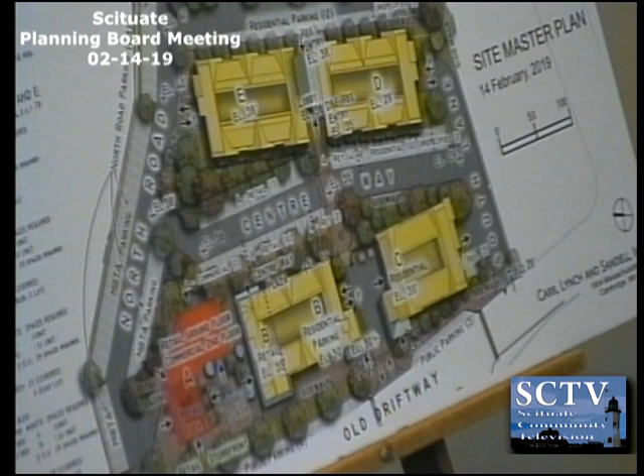We can give you the breakdown of those as well, but the Greenbush Plaza area, as we're calling it, we really want to create a vibrant sense of place there in the public plaza. We'll show you some renderings of that in a few minutes. So the idea is to have a great mix of retail and commercial in that space around the plaza. We'll have seating for people outside, bike racks, storefronts. We want to make sure it's a really active and lively place.

That's really our goal, to have an interesting mix of uses there. We want to attract a whole bunch of different types of residents, but hopefully we can attract residents who are commuting into the city, hopping on the train in the morning, going to work. So we're going to be pushing for that type of tenant. The reality is you'll see a lot of empty nesters too who want to locate and live here, but we really want to make it an attractive spot for folks, whether they're staying in town or new to town, to take advantage of all the great things Scituate has to offer. That's why I mentioned the bikes and promoting the use of the waterways and everything else we love about Scituate.

As per the town guidelines, 15% of the units will be affordable. That's 12 units spread throughout all of the buildings, a mix of 4 one-bedroom and 8 two-bedroom units that we've designated. And I don't know if we want to break there.

Jim, will you just show the renderings of the public spaces before I go on to the next piece? Okay, do you mind? Who does that? And if you want to speak to these as well. It's not a good start when your pointer doesn't work.

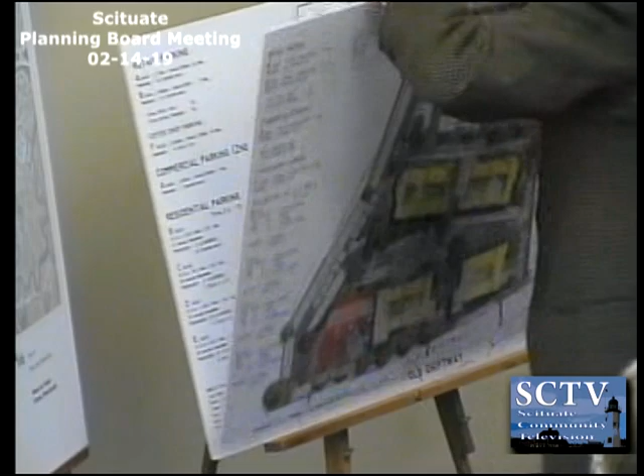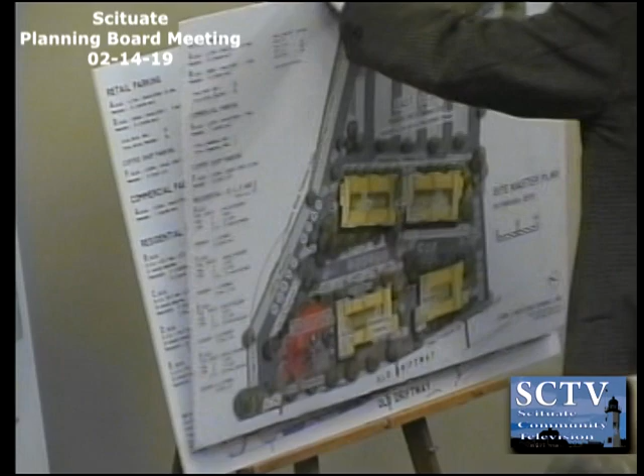No, okay, this is the illustrative site plan. I'll get out of the way so folks can see it. It shows finishes, surfaces, materials that delineate the travel ways, roadways, and internal circulation, as well as the open space, green areas, and plaza areas. When you take the trees and everything off, we've done this drawing which is much easier to visualize and understand in terms of the uses, and also compliance with local zoning for parking for the units.

So this drawing shows North Road access up to the bulk of the MBTA parking in the east lot, as well as parking along North Road. This is a plan we've gone back and forth on with the MBTA, working out how they would manage it, surveying the cost to make sure everybody has their stickers and all those things. So it's all kind of put in one place.

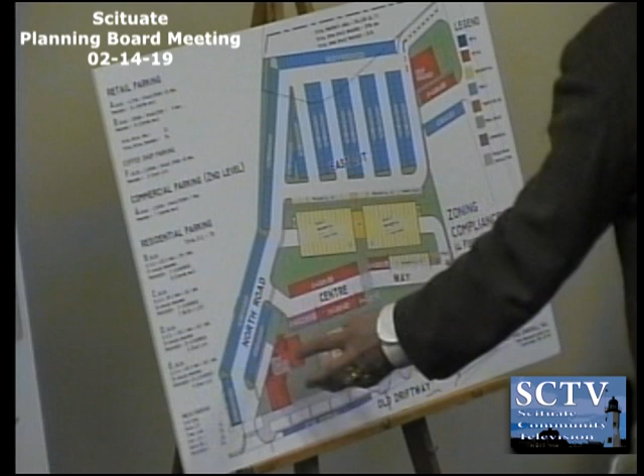As John said, when we began, this project actually began with this as one of the sites, if you'll remember the first time around. Then ultimately the RFP wound up saying, okay, we're going to sell the whole lot, but we get to keep most of it for parking. God bless the MBTA. So we developed the plan, and what we really wanted to do was get a streetscape, but we recognized this will never be Newbury Street because there are no connections on either end. So what we tried to do was create enough density with the retail to create our own place here, and we used buildings A and B to form the physical shape of what we're calling our public space, our public plaza.

So the concept is you can go out or you can sit in here, and we're hoping for some kind of a coffee shop or retail, that's what we'd like to see. So you can sit in here and look across and see the platform. And when it's time for the train to leave, you know because you hear it and you see it, so you just simply walk across and get onto the platform.

I think what we tried to do is amplify and create a plan that was consistent with what you folks did in terms of creating a special district, because this is how planning should work, right? Here's a train, this is where you want the density, this is where you want the people. So we've tried to reinforce that with public space on our piece of land, and define it by the retail wrapping around it and making it a good place.

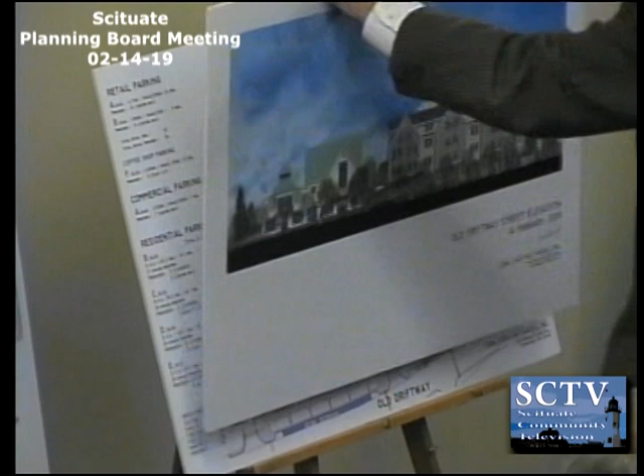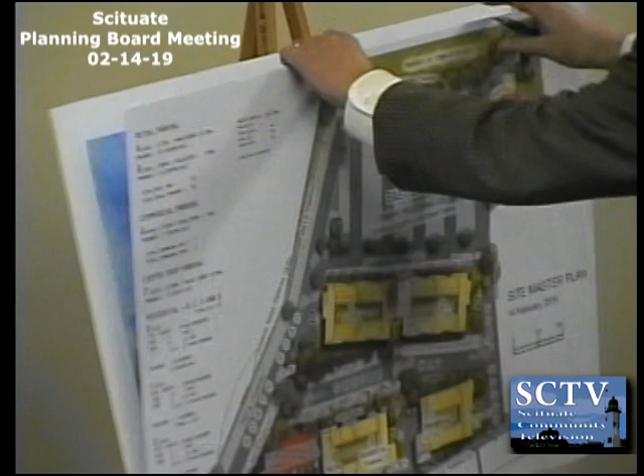So we did an elevation, and this elevation shows the dark line is the cut through the profile of Old Driftway. That's the exact roadway, and this is the site. As you all know, the site climbs up precipitously in some places, from the low point down to the very end, up to the high point. So we've developed a build in terms of the buildings being podium-based buildings where we can take advantage of the site.

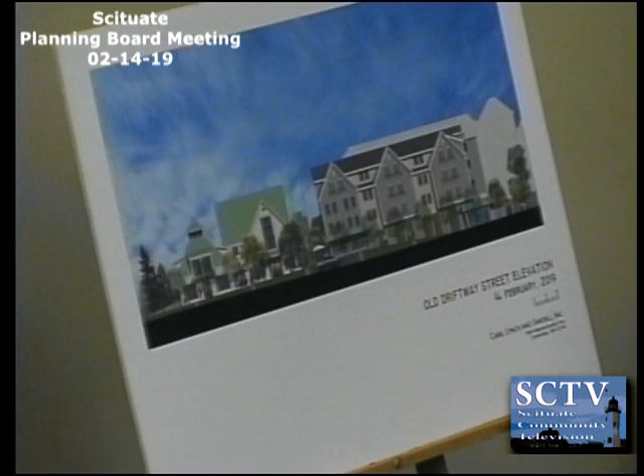Where as we step up, we can come in underneath and have a podium with a retaining wall on the uphill side, columns on the front side. So if we have to conform to the parking required for the units, we just run out of open space. You know, the cars take just a tremendous amount of space.

So our plan, I think, actually works really well because we can use all of the space underneath the buildings, underneath the podiums, for parking for the residents above, which is kind of what you want in the weather of New England. So you can come from your unit above, go down through the core, and exit right into the garage. So you can park and you're on your way. That works really well.

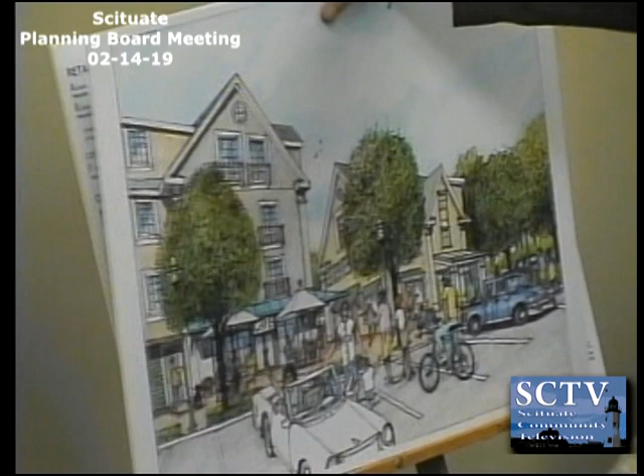So we then generated some sketches of the possibilities of how we would develop the public spaces that link the retail, the public plaza, and the connections to the other buildings, D and E. These are walkways. This is the parking for the retail and the commercial, and some residential, but this is one sketch of kind of what we see as possibilities.

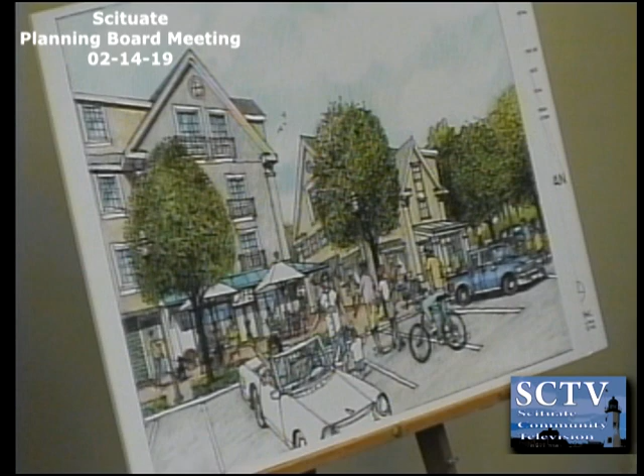This is building A, this is building B. The ground level of building B is retail space, and the ground level of building A is retail spaces. This is adjacent to the Centre Way. So sorry, that's building A to the right and B to the left. It's the back side of the building. Oh, I see, we're standing behind it. Correct, gotcha, sorry.

No, this is the view I'm thinking of, this is the view from the train. Okay, let's start with, now the platform is behind my back. This is the Old Driftway coming here. So this is building A, this is building B. And the retail kind of wraps around the whole public space. And we're envisioning on that ground floor what would be ideal is a good place to eat, a good place for your family to go and get an ice cream, go out and sit in the piazza, a good place to service the needs of the local residents as well as the town of Scituate.

We see it being connected to the train as much as we can. You get off the train and you're going to walk home, and you're going to go over, and maybe you're parked behind, so you grab some pre-prepared food and grab dinner on the way. Maybe you live up here, so that's pretty easy, you just go in and get food and go upstairs, you're home.

That retail is just on that one stretch of B, not all the way around the corner of B. It's out back too, it wraps around. This is a sketch, represents just that one side, the one corner of B, it runs front to back. It's easiest to read on this plan, see the crosshatch? That's the total footprint for B, just this one piece that faces the piazza, as well as the street.

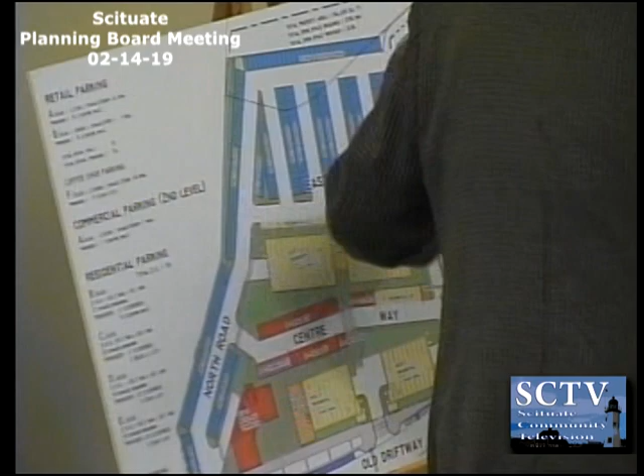Oh, so that's the circulation for the drive-through? Yes, exactly. This was the initial concept - if you come off Driftway, this is the through lane, directed one-way in. One way, but we can queue up here, order coffee, go around and pick it up. And these are the spaces for when they screw up, you can pull in, go yell and get your coffee. But this is done kind of for planning to make sure we can do it, because drive-throughs are difficult to make sure they work.

But David Black's here, he can speak to the traffic, because we're doing the traffic studies.

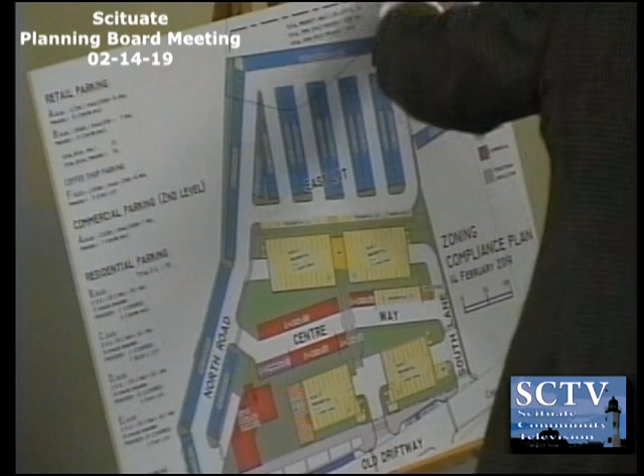If that is a one-way in off of the Driftway, yes, and then you're going to scoot around with some parking spaces there - I would suggest that you make that a one-way out with a right turn only, no left turn at all. The top of the hill is here, so the safe way would be to take the right. Only right, yeah, no left turns. Okay, all right.

David, you might want to speak, I mean, just - yeah, I think first of all, just by way of background, I'm David Black from VHB.

I've been doing traffic engineering and transportation planning for more years than I want to admit - about 45 years. 30 years of those have been on this side of the Atlantic. And John was actually my very first client, so I've been working with him for many years.

He literally met me off the boat and showed me which side of the road to drive on.

We've done a fairly detailed traffic study for the project based on the current program and the illustrative site plan. VAI has done a very thoughtful peer review, highlighting things we need to walk through, such as the drive-through operation, whether there's enough room for queuing, and whether turns out of the site should be restricted to right turn only. So we're absolutely coming at this with a very open mind.

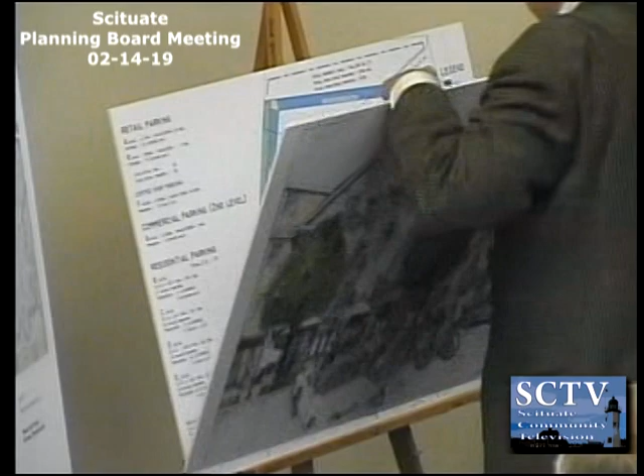Our answer to that problem, which is a problem when you drive by. There's a lot of podiums for driving from Scituate into Boston, you go through Weymouth and Quincy, and a lot of buildings are built that way, with parking underneath the building. You look in and see the soffit of the garage ceiling, all the junk hanging down and the lights, and it's never thought out because the budget doesn't go that far typically. So it's awful.

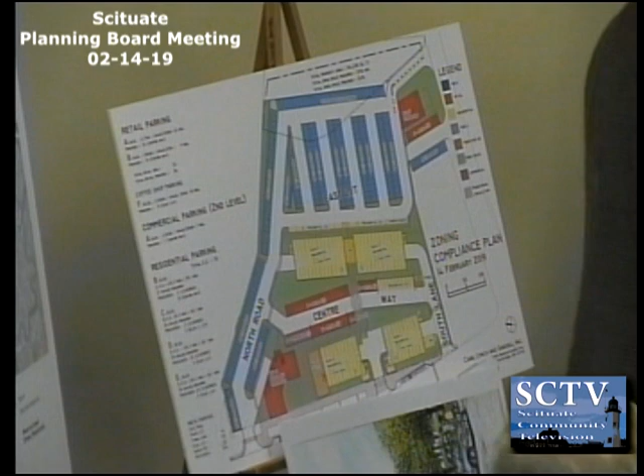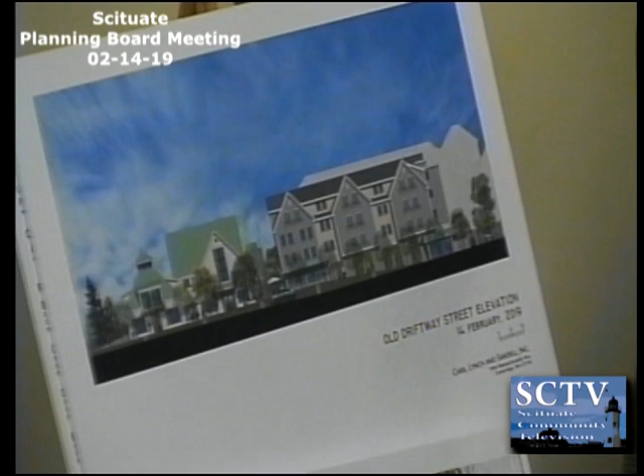What we're proposing is at the face of the building to show a screen detail, like screens that are built to hold vines as they grow up the side of buildings. We're going to do a light steel structure across that open area, put a screen on it, and plant Boston ivy along the base. Boston ivy's a great plant, it goes up and fills out, and it looks good basically all year round.

We're having our mechanical engineers give us their assessment and quantify the amount of air that can flow through. It's not a wall, it would be a green wall. We're thinking that would be a nice solution, growing green year-round, while still letting air flow through, so you should not be able to see in. The green wall should stop you from seeing in, so the parking would be behind that.

May I move on to have the board ask questions? And then open it up to the public? All right, I'll start with the town planner. Well, we have our traffic consultant here too, would you like him to say a few words? Sure. Thank you. Mr. Dirk?

Good evening, Madam Chair and members of the board. For the record, my name is Jeffrey Dirk, I'm a partner with Vanasse & Associates, and I'm your review consultant. We've had a chance to review the plans and materials submitted for the project, and as the chair indicated at the beginning, and as you heard from the development team, this is a project that's in flux. If you look at my comments, what you'll see is we've got to bring everything together. There are things in the traffic study that need to match up with the site plans, and the site plans need to be engineered. So in my comments, I'd have the applicant take those as guidance on what we'd expect to see in the next submission of documents that come before you.

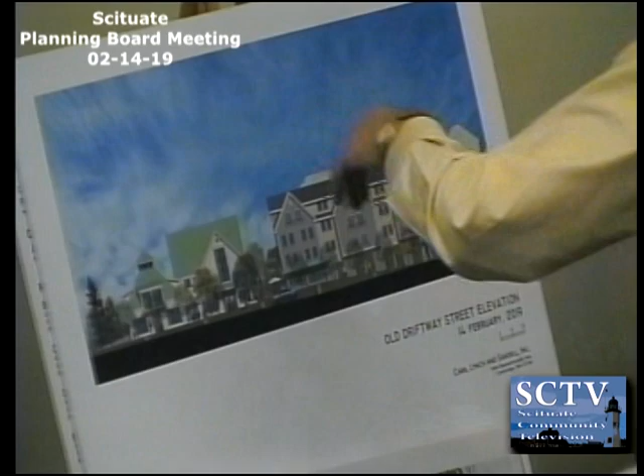I'll start with the site plan. I think from the standpoint of what you see, there's a lot of great concepts, and the project itself has a lot of excellent attributes to it. And now we need to engineer this plan.

So I think as we're looking at this, we need to make sure, as the applicant has said, vehicles can access and circulate within the site. Thinking about loading and delivery, how do fire trucks get in here, how does that all happen in the environment with on-street parking and everything, which creates the village atmosphere they're talking about, but now we need to bring it to the functional level.

So where are the loading zones? What size trucks are we talking about when they get into the driveways themselves? That's all going to come as a part of the engineering of the plan.

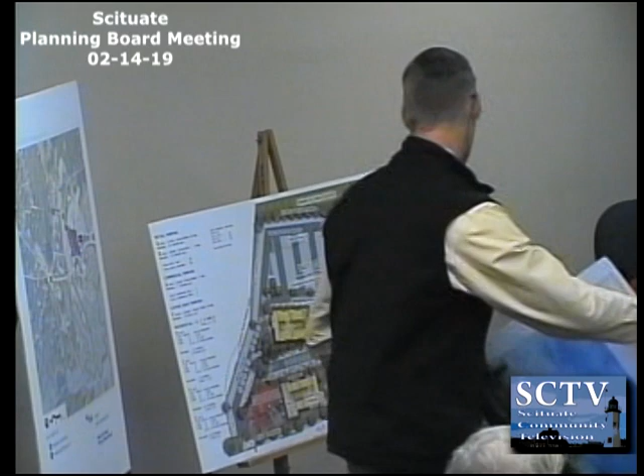The other thing we have to look at is this, I had not seen the zoning compliance plan, so we've asked that they develop what you typically see as your zoning compliance chart. We need to see, does the parking comply with your zoning standards?

The one thing that was of concern to us, we understand this concept of shared parking here, is that we know there's great access to public transportation, but as you get away from the urban core, parking for residential, when you start getting below 1.5, that's a low parking ratio.

And I think what they've got here, just looking at the residential piece, is somewhere around 1.37 or so, which again, the reality of residential as you get in the suburban area is just thinking simply of, I need to go grocery shopping, there's not a grocery store here.

So even though I may leave my car here and jump on the train and go to work, that's great, but when I come home, we need to think about how residents are getting to do those normal daily things, which starts to get us to a parking ratio of somewhere between 1.5 and 1.7 for the residential.

So it's great if they can do mixed use some of these parking spaces, but we'll need to see through some analysis that they'll provide to say they're achieving those parking ratios, because you really need between 1.5 and 1.7 to make the residential functional.

If you don't have that, what you start to see is then where they're designated the retail, those will end up being residential. This retail starts pushing over into the commuter, so it starts having this cascading effect. Again, I'm sure they can figure it out, we just need to be able to see the numbers that relate to that.

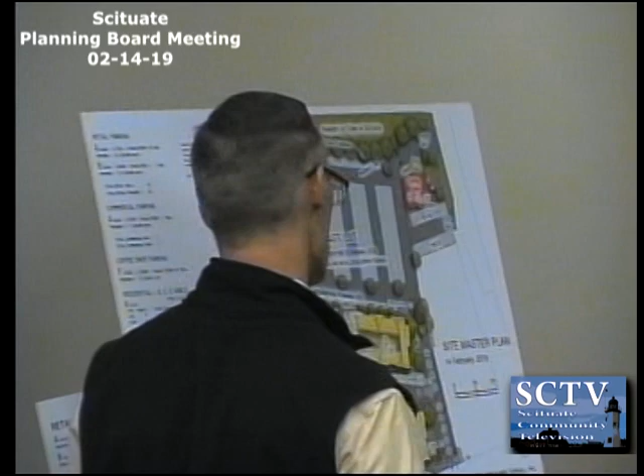So not only are we adding a curb cut, but now we're having two curb cuts that are offset from the exit from the parking lot. So we've asked the applicant to explain how that's going to operate and undertake what they describe as a safety analysis, because this creates conflicting turning movements coming out of these lots. Again, if you picture the train comes out, everyone gets in the car and they're leaving, the interaction of those exiting movements for these now offset driveways needs to be thought out a little bit more as well.

Lastly, in looking at the plan, there was mention of this coffee shop as a placeholder. There's a lot of implications related to that coffee shop, as you probably know, not only the queuing, which we've asked the applicant to go back and look at as well, but the way that we generate traffic numbers from mixed-use developments changes as well.

So the way that this has been done is it's assumed that all of the retail space is just classified as general retail, and it's analyzed as a shopping center, which when you have a large amount of retail space, that makes a lot of sense.

With a small amount of retail space, and one of them being a drive-through operation, it starts not to have those traffic characteristics. What you end up having is this use here will end up generating more traffic in and of itself than this small amount of retail space. So that has significant implications in terms of the net increase in traffic, but more importantly, how this driveway functions.

We've asked the applicant to take a look at this driveway, and I know you've had some comments on that as well. We're very concerned with how this will operate, especially having an entering lane next to a drive-through lane. As you imagine coming into the site, there's a significant conflict point as you're merging one-way traffic entering a drive-through lane that wraps around the building with two-way traffic on the drive aisle. If you start drawing arrows on a plan, you see a convergence of a lot of things happening in that area.

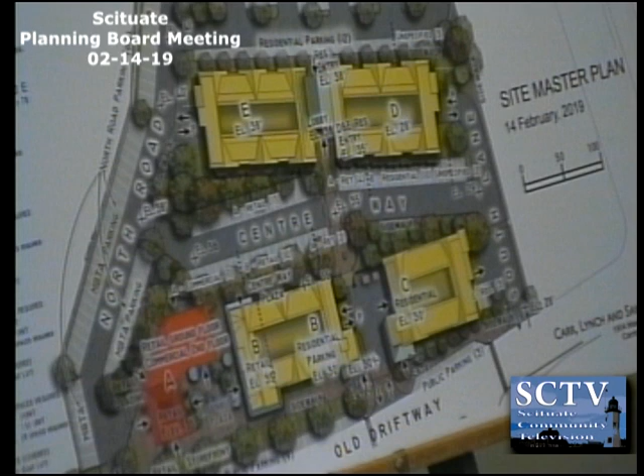The site, even though it looks enormous sometimes, is pretty constrained in terms of where you can actually build. We looked for a period of time at residential building C - we always have to preserve our pro forma to get it built, but we looked at whether that could have another use while still supporting the same number of units. We talked to some potential tenants exploring if that made sense, and it didn't work out for the site. There's a limit to the amount of retail you can put on the site to make it viable, and we tried to keep the space.

We have a couple of ideas on who we'd want to put in some of these spaces and the uses, and these sizes actually are the right size. And then the commercial in Building A is just a natural fit because it's another story above, so that doesn't make sense for retail.

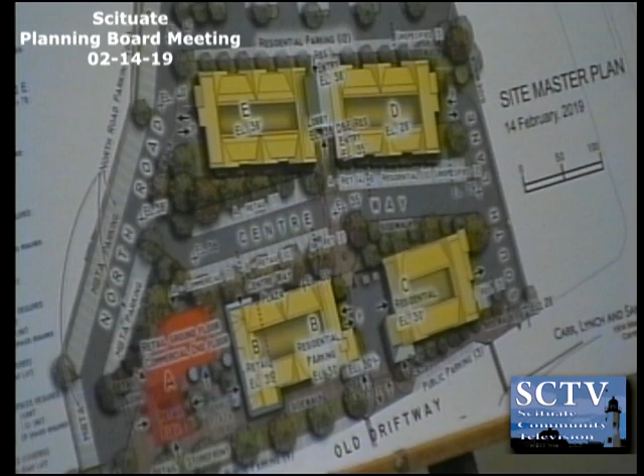So it started off with our vision of what we hope is going to end up there, but then working out the numbers dictates a little bit how much we could put in there, and how much risk we take on. I would also add this is meant to be complementary to what you already have. There's always going to be a certain amount of competition, but I think this is additive and it works out, not meant to take people away from other merchants in the town.

So we look at the proximity - we look at this as more casual, people coming in and out, going from the train, as well as residents utilizing that sitting area. We want to make that attractive because we think people will spend some time there. But the upstairs would be for offices, doctor's office, whatever it might be, which we think again would not detract from what you already have.

So we paid some attention to it, and it's following your guidelines - it's meant to be mixed use. It's not meant to be commercial, in preponderance of commercial, put it that way, in retail. So we think we're trying to follow that.

And from a pro forma perspective, I think rental housing is something that is not prevalent in the town or in the area. And as Jim pointed out, one of the things we looked at was the back and forth to Boston - it's a good place to live and get on the train and go back to work if you're working in Boston.

It's also a very interesting place if you think about people who own homes who get older, like myself, who want to stay in the area - what's their choice if they want to sell their home and stay in the area? They don't have a lot of choices available to them. So this creates some choice too, so hopefully people can utilize that choice to stay here and also come out of the larger home. So there's a mix of ideas in that.